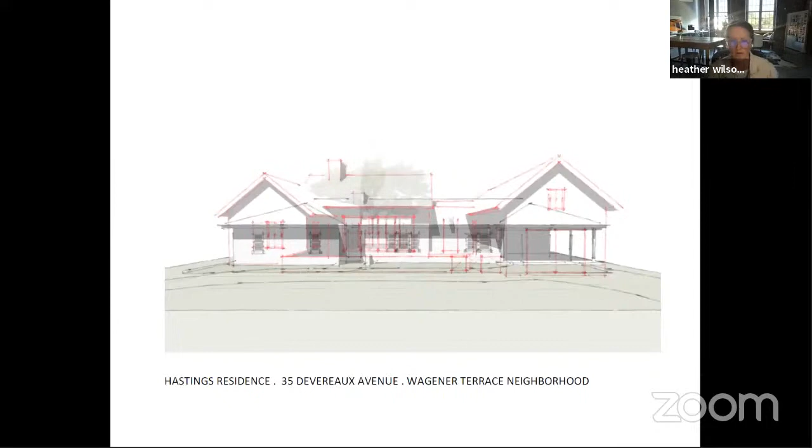Thank you for your time. I know most of you saw the property today, so I'll move through it fairly quickly. I want to start by briefly going over the history of why we're here today. The homeowners bought the house with the full intention of rehabbing it, renovating it, and living in the home. We were drawn to the low-slung nature of the house.

At the time, the flood zone went through the house and it was below flood by a foot. So the original plan was to add a foot to the interior finished floor and lift the roof. That was going to be the request. That's really what triggered most of the structural engineer's comments in the letter before you - any alterations to this property would be very difficult because of the sheathing and the lack of shear strength behind the veneer brick, and the state of the foundation, or lack of foundation, was not adequate to add to or renovate the home in any meaningful way. So that started the conversation about what best to do.

During all of this, the flood maps did change, and this is a very unusual situation in that the house is currently technically in an X zone, but it's 8 to 10 feet from a V zone, which is 4 feet above the finished floor of this house. So it's in a slightly precarious and unusual position. It's also unusual relative to the adjacent homes in that it is at grade. At the rear of the house, because the back is a drop floor, it's flush with the grade. So there really is no protection from storm water, both rain and surging. That's really the big issues we're wrestling with.

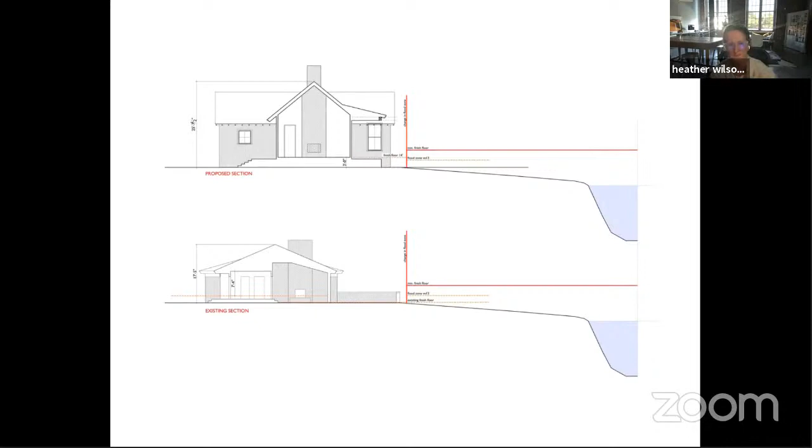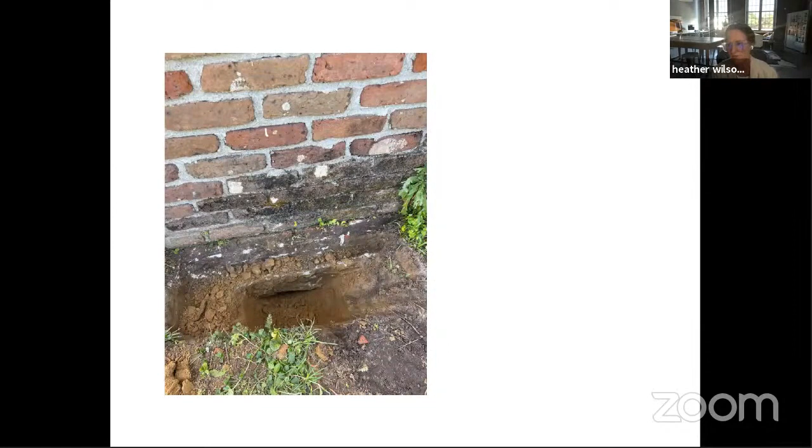That was where we did some excavating to determine the size of the footing, which is referenced in the engineer's letter, and the sheathing that doesn't provide the shear—it's crumbling. The engineer's letter.

Kim, I know you said you had to blaze through those, so that's fine. Heather, you've got about a minute left. Okay, well, this is how I finished.

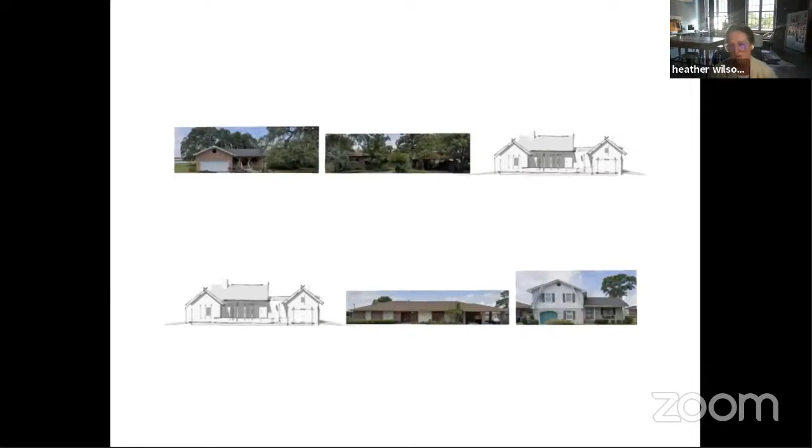I was just trying to show that, without mimicking the original home, we are really drawing from it in scale and design, and then again salvaging that brick and reusing it just as they did 52 years ago. We wanted to honor the material and the home in that way.

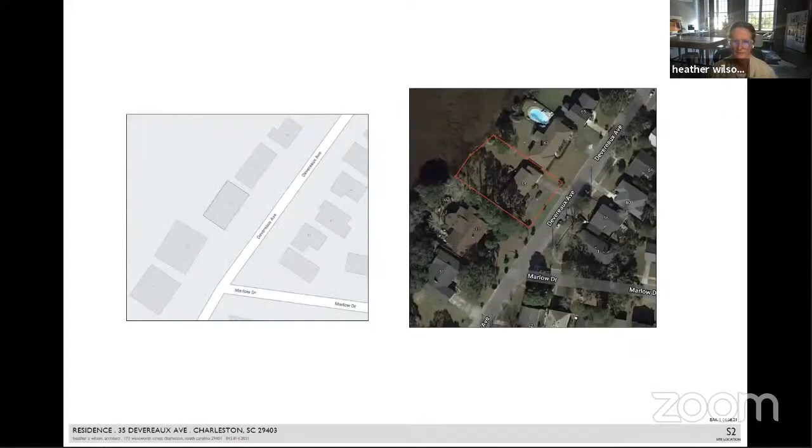You could probably leave it on either of those, as they're probably most material to the board's discussion. Those are the existing home.

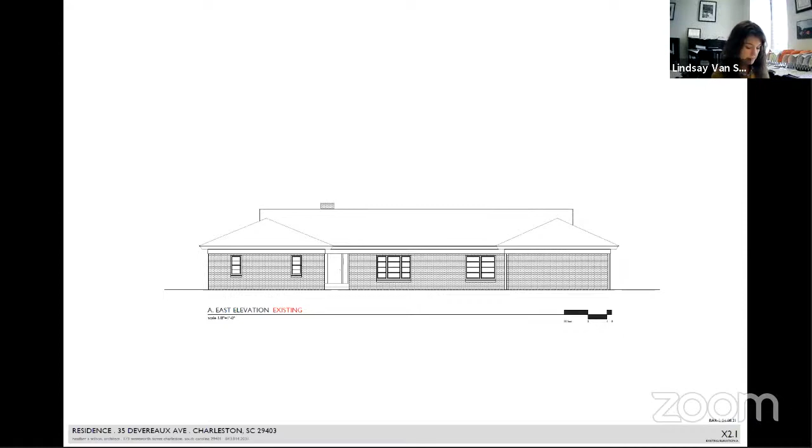On to agenda item number 2, 116 Ashley Avenue. Kim, you're on mute.

And if we have Carol Houle, Carol, you have the floor whenever you're ready.

Oh, sorry, yeah, and David. I'm here. Good afternoon.

I wanted to say thank you first. This is a very thoughtful process, and I have to say, for the record, I'm not an architect. I'm not a historian, but I'm a person who loves the historic charm of the city and would like to plant roots there. So I wanted to give you just a little bit of an introduction.

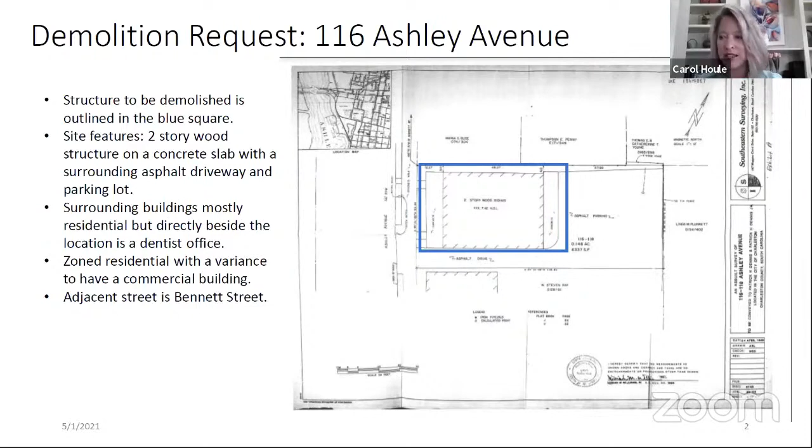And as I go through some of the other photos, you'll see that the drywall has been removed in the base of each of the rooms because of previous flooding. It's our perspective that this architecture does not render the character and charm defined by the traditional architecture of a Charleston residence and the houses that are around this structure. You can go to the next slide.

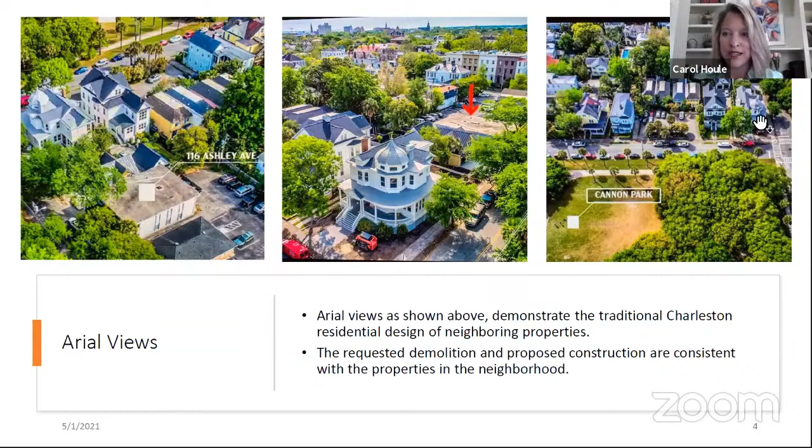So we'll walk down the street as if we were taking a stroll. This is that beautiful house at 11 Bennet that was recently renovated. You can see by the arrow, it is right next door.

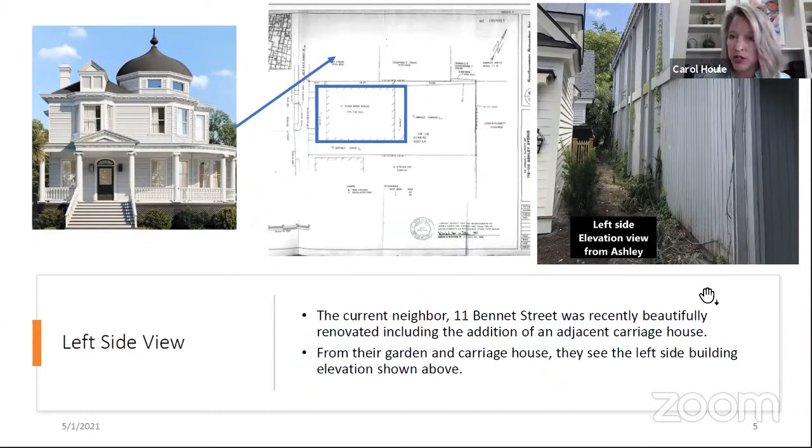It has a carriage house that was recently built, and a garden, and from their property, that's what they see, that left side elevation view. You can go to the next slide, please.

Walking down the street, this is 117 Ashley, which also has been beautifully renovated. And from their front yard, they see the front, and then they see this right elevation view there. You can jump to the next slide.

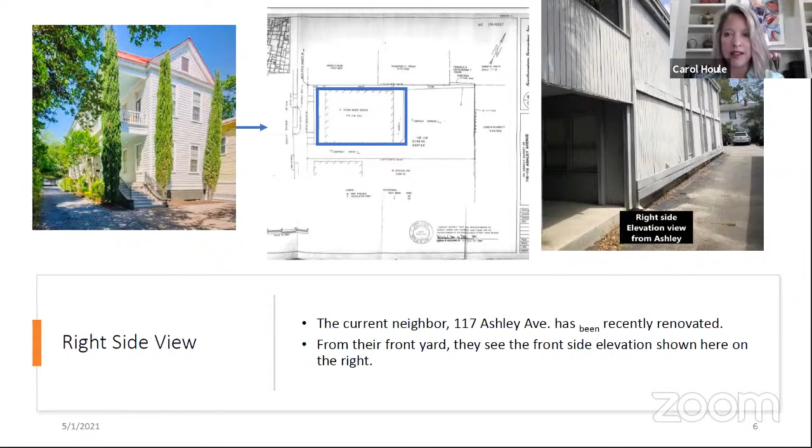Continuing down the street, this is the next house that again has been beautifully renovated. And from their front yard, they see that front elevation in the side. You can go to the next slide, please.

Again, walking down the street further, this is 113 Ashley, beautifully renovated. Now they don't see this back view, but I just wanted to continue walking you down the street so you can see what's happened in the neighborhood. You can see there on the right-hand side what the building looks like from the rear.

And we did take a walk, although I didn't include the pictures, around the street of the houses that would be on the backside of 116 Ashley. And it's the same story—they're all really beautifully renovated residential homes. Can you jump to the next slide?

So these are interior photos, and we have confirmed through conversations with an architect that the current structure doesn't allow us to move forward with more of a residential design. You can see that the drywall has been removed due to flooding.

I would like to point out, however, that does appear to be an original Apple Macintosh with a floppy drive, so we might actually keep that. It's funny—that might be good for the library. You can continue to the next page.

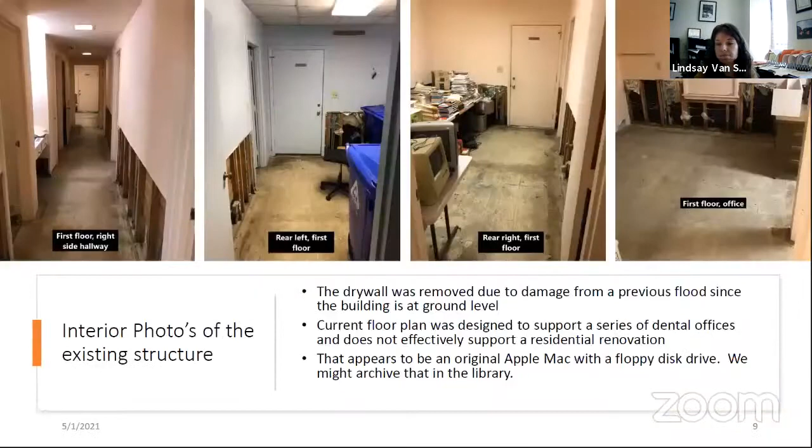All right, move on to public comment. Kim, it looks like we have no one speaking. We just have one letter from Timothy Liptak.

Timothy Liptak was at 114.5 Ashley. He asks: if demolition occurs, how will the owners ensure my property next door is protected, as well as my patients during business hours? Since the buildings in this area are in close proximity, how will you mitigate construction, traffic, and debris? And Kim, do we have anything else that I am missing? Nope, that's it.

Kim, if you'll give city staff comments and a recommendation. Sure. This building does not contribute to or characterize the neighborhood in Charleston Village, nor is it constructed with unique or irreplaceable materials. It is in the old historic district, which will require board review for demolition. So we are recommending final approval.

Thank you, Kim. Ms. Houle, did you want to respond to any of the public comments? Sure. Yeah, that's a great point. We are in no hurry whatsoever, and we're working with a company to do the demolition that seeks to preserve and reuse as much of the materials as possible.

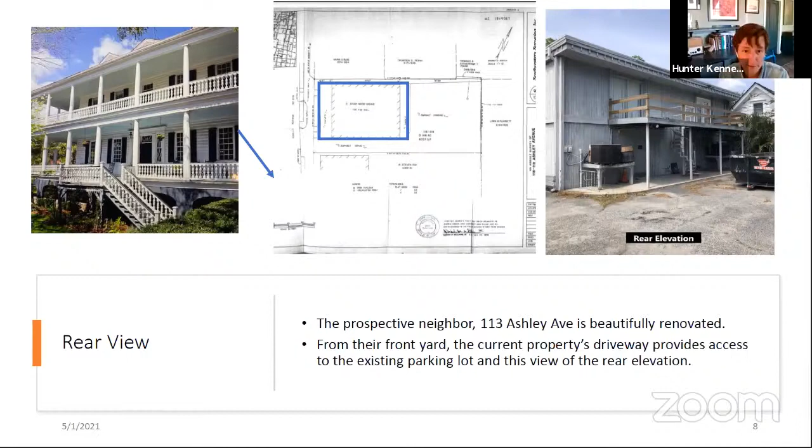Eddie? Yay, but you must salvage the Mac 2 computer as part of the deal. That cannot be demolished. That is a motion on the floor.

I'm checking. Yay, in favor. Julia? Yay, in favor. Chair votes with the majority and the motion passes unanimously.

Thank you very much for your time. I appreciate it.

Okay, agenda items number 3 and 4, both 60 Meeting Street, have been deferred by staff. Agenda item number 5, 4 Lowndes Street, has been withdrawn by staff. So we are on to agenda item number 6, 62 Queen Street. Kim, you'll give your intro. I will. Thank you.

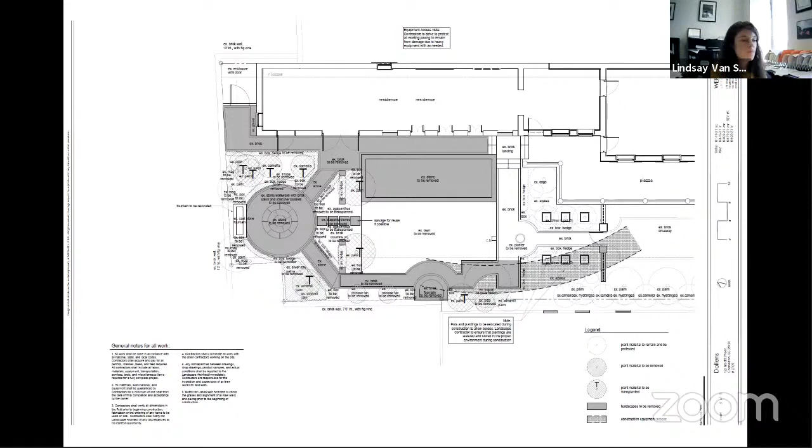Looking at the existing garden and speaking to the clients, we found that the circular patio space at the very rear of the garden was not very useful for families' needs and was really an ideal location for a new pool. We were able to maintain the dining terrace and lawn space, which is great for the kids, as you can see here, and their pets as well.

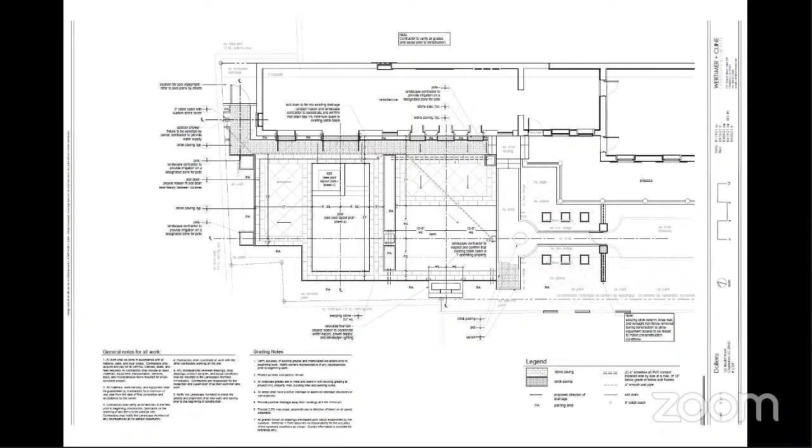There are currently 2 fountains back in the existing conditions plan. I can point those out. Advance one forward, please. Okay. One fountain at the rear is going to remain, but it's going to be relocated to the bottom of your screen in the middle, where that right there. So we're going to relocate that to where that existing fountain is, just to make room for the pool deck.

In order to allow for construction equipment access, we are going to have to remove a brick column and brick coping with a wrought iron fence. Just temporarily remove it and then build it once construction of the garden is complete.

And then as far as landscape lighting, we are proposing all path lights and one fountain light. I believe that's all I have. So if there's any questions.

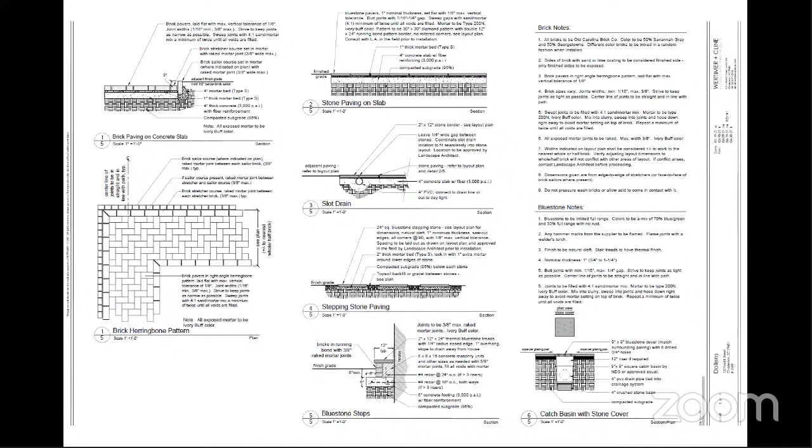Thank you. Since this is a Category 2 building, all modifications must be heard by the board. Otherwise, staff would have given a swift approval. We do suggest a dialogue to modify a policy statement to give authority to staff to approve minor adjustments to Category 1 and 2 buildings. Conversation for perhaps another time. This proposal is appropriate and modest, either reconstructing what was previously existing or only moderately visible. So staff is recommending final approval.

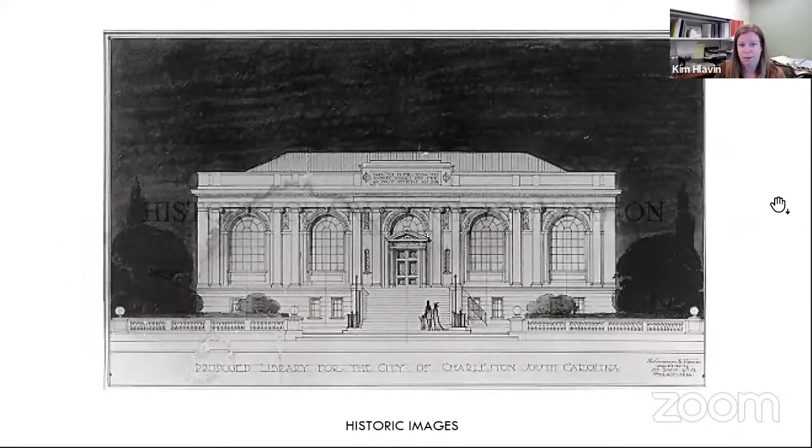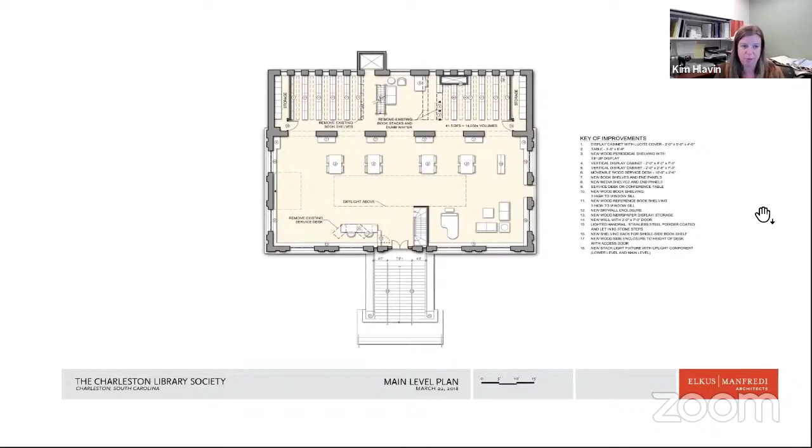Looking north on King and looking south, and some old images. This drawing was from the most recent trip the board made, the project made in 2018 for window replacement. I figured this drawing might be helpful to show where the bluestone treads are going, and this one as well.

And I'm going to turn it over to James and Dominique Volpe.

Mr. Volpe, you're on mute. You are still on mute. All right, here I am. John Smart was actually going to be talking, I was just following the meeting. I don't know if he's out there somewhere. John, you there? Oh, I see him. There we go, Mr. Smart, you're on mute. Mr. Smart, you're still on mute. Good afternoon, can you hear me all right? Yes, we can, thank you. Sorry about the technical difficulties there.

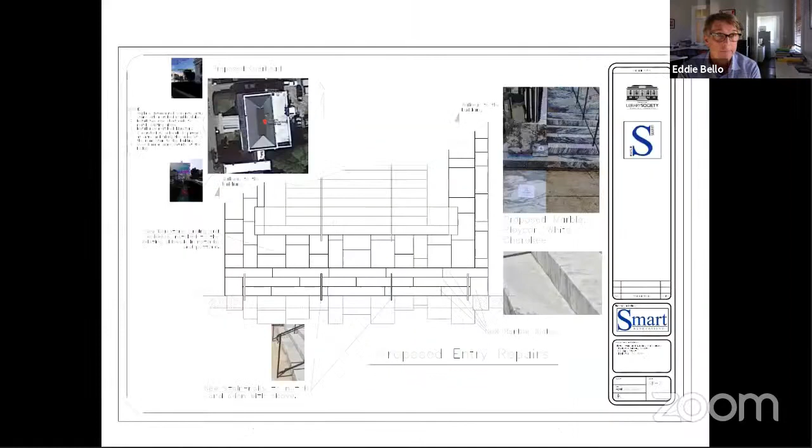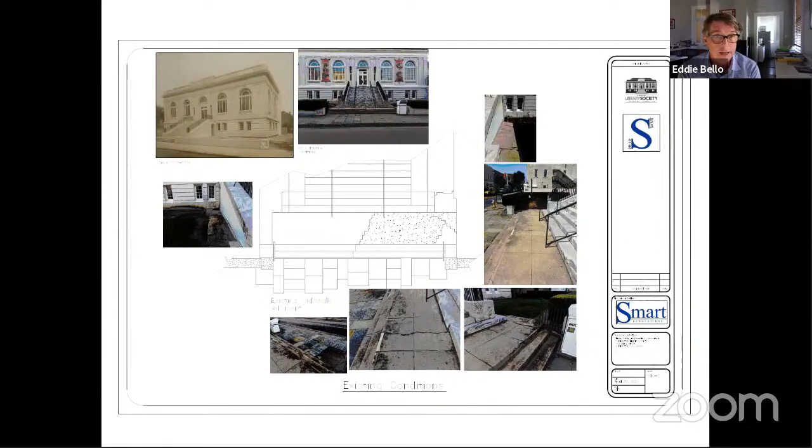I have one comment, and it has to do with why I brought up those railings at the bottom. Those aren't historic. If you look at the old photographs, those were never there. They were just added, and you don't need pickets per code or anything. So if the intent is just to have a handrail for people to get up the stairs, I would ask that they just match the simple railing design in the center of the stairs and put those on either side instead of adding those non-historic ones. I wouldn't want to match something that's not historic and not really needed.

I think it takes away from the elegance of the stairs. I didn't think they were going to match the picket rails, I thought they were going to match the ones in the middle. The picket ones aren't great, I'd rather not see those again. If those are going back, or he's going to add more to match it, I don't support that.

Maybe the applicant can clarify, because it's not on the drawings. I don't see it anywhere. It says in the application, new rails to match existing. I assumed that was without pickets, because that would be a waste of money. I agree, so maybe we can add that to the motion, that it would match the center rail design.

Final approval with a condition to match the existing rails on the upper run, no pickets. We have a motion for final approval on the floor with a board condition that they match the upper rail. Julia? Yes, no pickets.

Do you have a second? I'll second it. Eddie, thank you. I'll put it to a vote. Bill? Yay, in favor. Hunter? Yay, in favor. Julia? Yay, in favor. Eddie? Yay, in favor. Chair votes with the majority, and the motion passes unanimously.

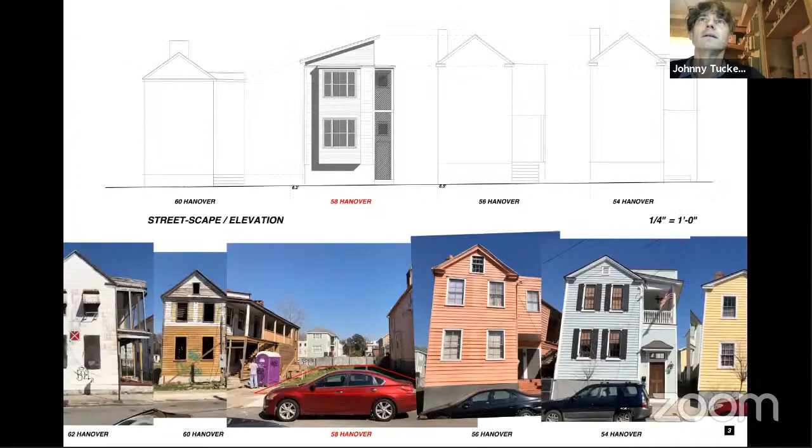So this is a streetscape, again looking east, showing that there are some sister houses to the south that are nice, traditional Charleston single houses, and then some smaller houses to the north. You see the one that's currently being renovated directly to the north. This is showing that we're trying to fit within the height, scale, and mass of the adjacent properties. Next image, please.

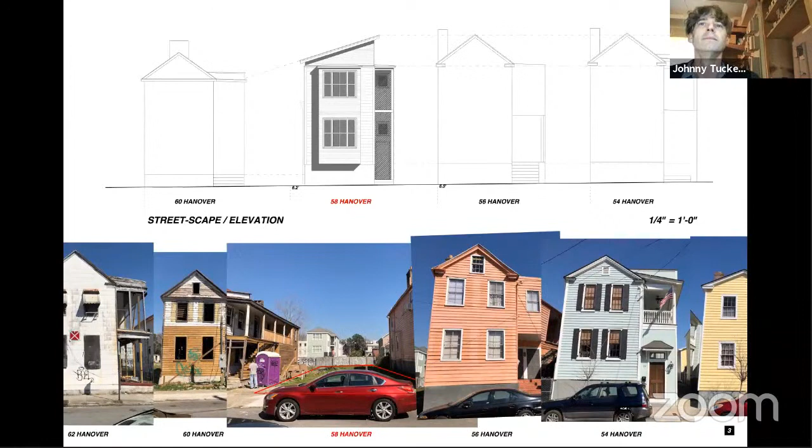And this is the streetscape on the west side of the street. You'll see, again, a nice row of Charleston single houses, some later, not as successful houses to the south there. It's hard to see, but that little red dotted line shows the ghost profile of the proposed house at 58 Hanover. Next image, please.

And it's a simple little single family house, 2 stories. We're actually elevated because of flood, but not a full story, less than 6 feet. It's a little over 1,700 square feet, 3-bedroom, 3-bath house, with a small roof terrace at the back, which you'll see in the elevations.

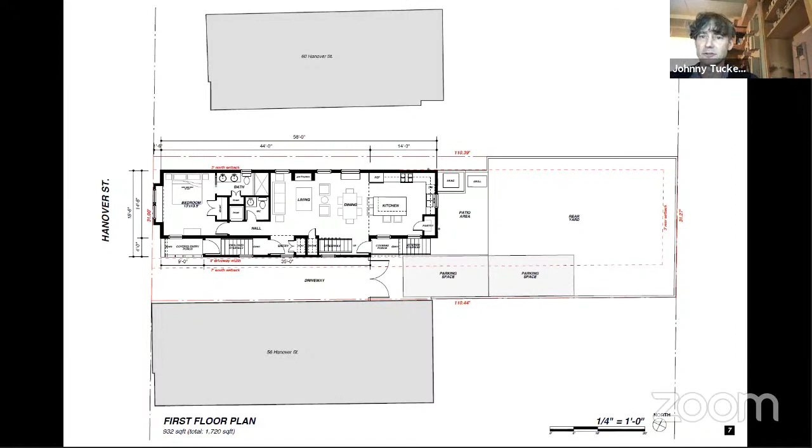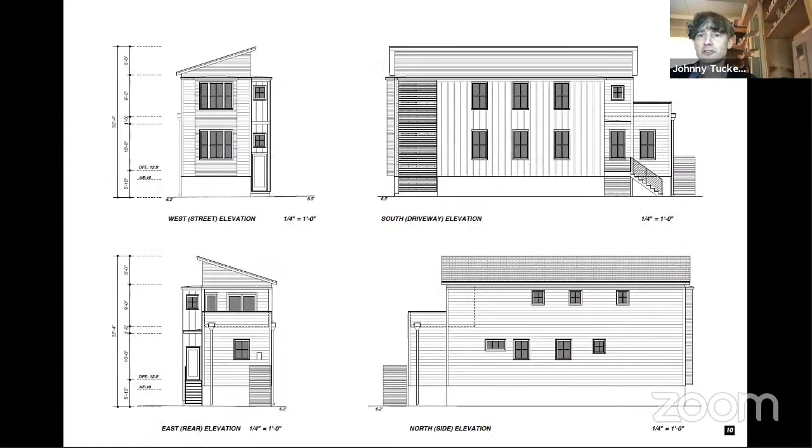And if you could go to the next one, the next four slides will just be enlarged. I'll just walk through those quickly.

So this is the West Street elevation, and you can see the flood maps have changed recently. Obviously downtown that's happened, but we end up in AE flood zone, so design flood elevation is 2 feet above that, right at 12 feet. Fortunately it's low here, around 6.2 to 6.5 feet above sea level, so we're under 6 feet for the base, the crawl space. Fortunately some adjacent houses have the same condition, so we think you'll see in the streetscape at the end that it sort of successfully mimics those.

South side, the south driveway elevation, you'll see there's a little bay window. If you don't mind going back one, Kim, thank you. I did show some shadowing on this front elevation, because you need to understand the three-dimensional quality of that bay sticking out 18 inches, and there's a screened element in what I'll call a piazza, although it's pretty skinny because it's a skinny lot. It's trying to create somewhat of a traditional feel of a side piazza, but it's not.

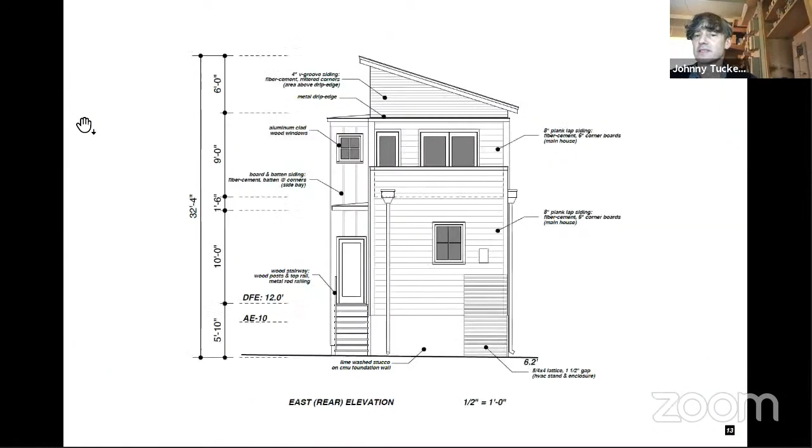And then that side element I pointed out, the piazza infill, not a piazza but as if it was a piazza infill, is the board and batten. And then just the lattice at the front piazza, horizontal boards painted. Not a lot of railing. As I mentioned, there's a parapet at the back roof terrace, but there is a side stairway - I didn't point that out, but you can see it in the plans or elevations. There's a side rear stairway, and I was proposing there, on the next slide back, right there, lower right, a back stairway to access the kitchen, which is where that proposed metal horizontal railing is, not super visible, but visible down the driveway. But it is a new house.

And then the last material, if you don't mind shooting back towards the end there, Kim. Oh yeah, last and least, it is an asphalt shingle roof, hopefully not super visible. It is a new house. Next slide, and I'm wrapping it up.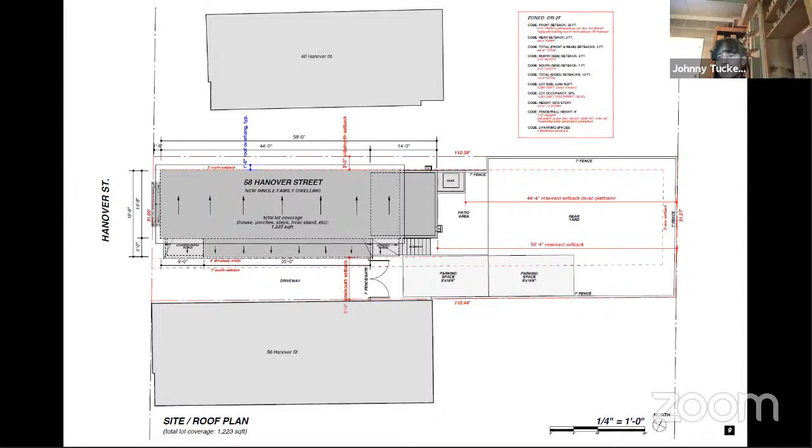Thanks, I'll ask one more question. On the front elevation, at that smaller mass - I won't call it a piazza - what we're seeing are just shadow lines, wide open with one horizontal tie-in at the midpoint. Yeah, this is, other than the shed roof, definitely unusual.

But since it's 4 foot wide, it's not a porch, it's an entry element, but it is covered because that side roof line extends the full width of that side element. The idea was to create a little bit of an unusual space that's covered, but not completely - because of the lattice, there's a lot of shade, mostly on the south wall. So that's what you're seeing. It is a double height space.

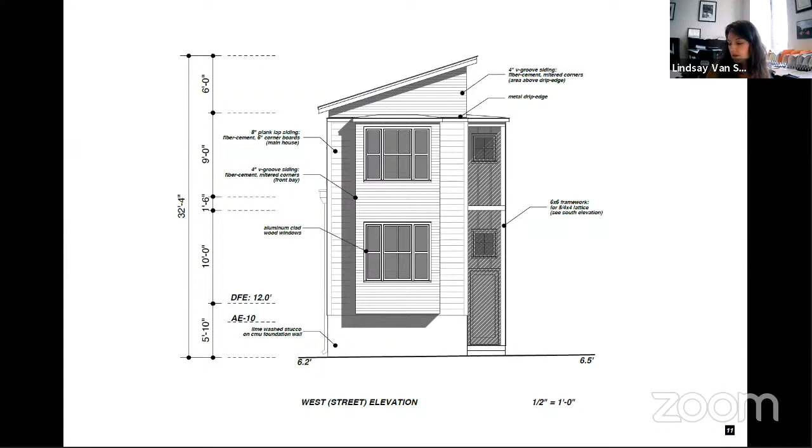Thank you. Any other board questions? All right, we'll move on to public comment. I think we have Earlene White.

Yes, can you hear me? Yes, we can hear you, Ms. White. I sent in a letter as well because I wasn't sure whether or not I could be here.

But my only concerns regarding this structure is the design of the roof. With the exception of a housing unit built in the 70s, all houses on Hanover Street between Columbus and Line Streets have the A-shaped designed roof. In addition, the majority have tin roofs. The lot at 58 Hanover Street is next to my house and in close approximation to 3 more 2-story houses that complement one another and maintain the A roof style. I sent some photos in.

He had already shown you, I believe, the south side pictures, and you would see how those houses are designed with that A-shaped roof. The house previously on the lot at 58 Hanover was also built with that A design to complement the area. I would like the owner to consider building the house with the A angled roof design so that it conforms to the traditional style and preserves a sense of history that we are accustomed to and proud of. Incidentally, those adjacent houses on that side of the street were all built in the 1850s, so they all really complement one another.

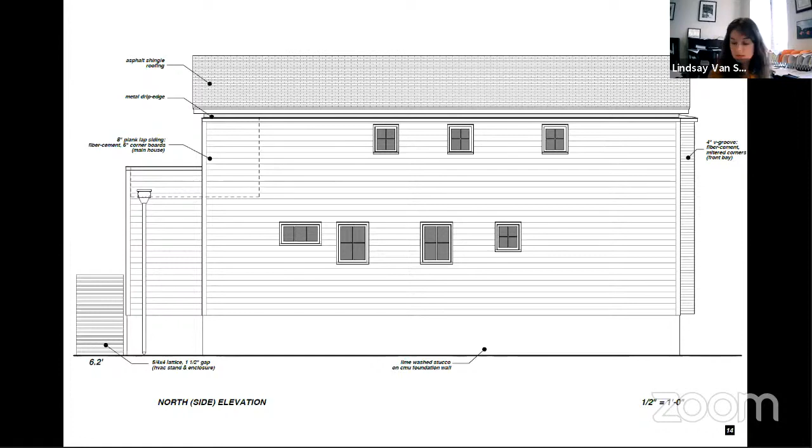Move on to Kim, if you'll give city comments and recommendations.

Typically, a shed roof includes additional clerestory windows to allow the entry of light. If it sheds to the south instead of the north, it has potential for solar collectors, but that might be the only positive of this roofline, which should be restudied.

The mass that simulates an enclosed piazza is inappropriate and should be restudied. The fenestration is orderly except for the north elevation; align windows with more consistency. The height, scale and mass is appropriate, but general architectural direction needs refinement.

So we are recommending deferral for general architectural direction, with staff comments noted. Thank you, Kim. Mr. Tucker, did you want to respond to any of the public comment or staff comments?

I will say the owners did present the project to the East Side Community Development Corporation, I believe is the name of the neighborhood association. I was not able to attend that meeting, but I believe the question of Mrs. White next door was brought up at the meeting.

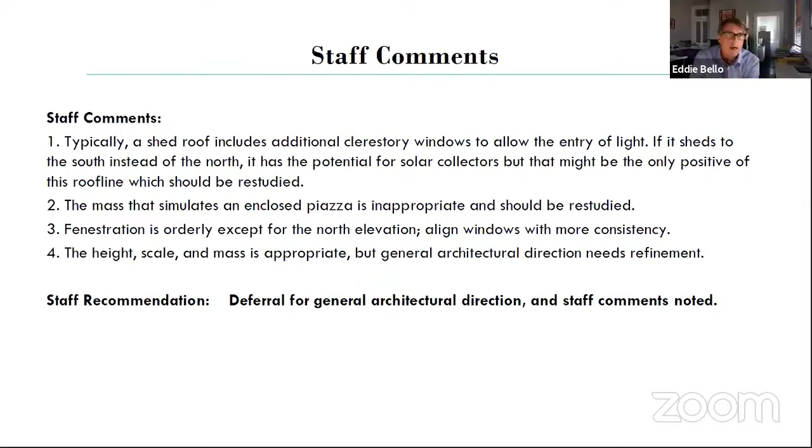Well, I'll add a couple things. I agree with what you said, Julia. I'm not opposed to the shed roof either. I do think part of the issue is, like staff brought up, the pitch has to be what it is—I'm guessing it's as low as you can go because you're using shingles—but you end up with just a blank space at the high portion, and that's not as strong as I guess it could be. So I don't know what you do with that, but I can see that being an issue, and I kind of agree with staff on it.

The only way to solve that would be to lower the pitch or lower the bearing height on the low side so it comes down and is a little more integrated with the building. I don't know, I know Mr. Tucker could figure it out, but I can see where, to me, that's a bit of an issue. I don't have a problem with the narrow entry—it's not a piazza—so I think all that's fine.

I like the lattice. This is more of a preliminary comment, but with just a single piece of wood over 6x6 posts, I think that could use a little more development and be better detailed, since it's the front of the house. The only other comment I had is can you show the south elevation, the next slide? I think it's the next one.

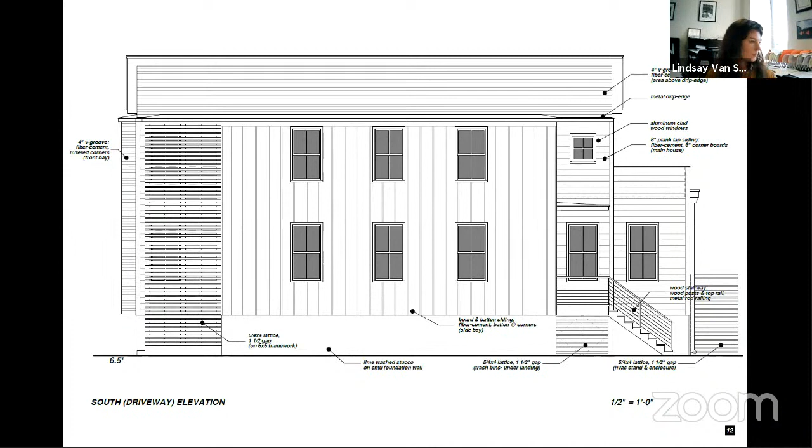Thank you, Mr. Tucker. Moving on to agenda item number 10, 17.5 Hanover Street. Kim, will you give an intro. Thank you, just bear with me for a moment.

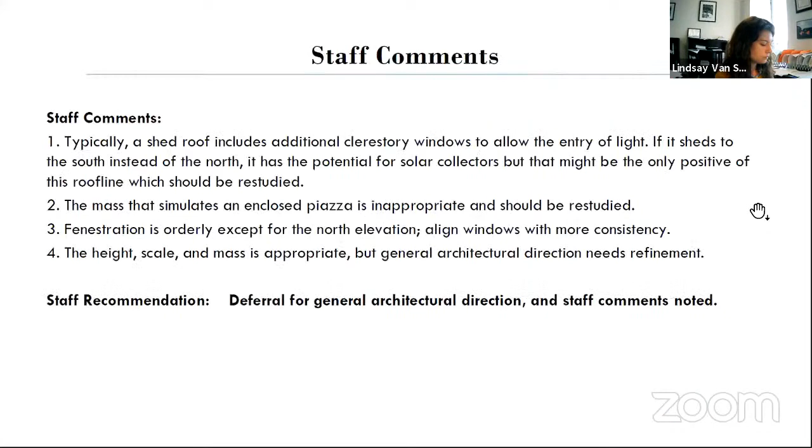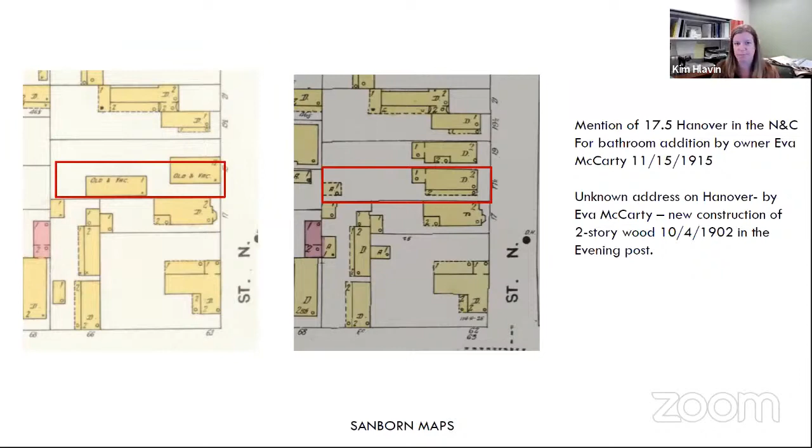Just going through the motions to find the age it was constructed. There's a mention in the News and Courier of a bathroom addition by owner Eva McCarty in 1915, and earlier an unknown address, but by Eva McCarty, for new construction of a 2-story wood building in 1902. On April 8th, 2021, the conceptual approval with staff comments was the motion. I'm not going to read these staff comments unless you want me to.

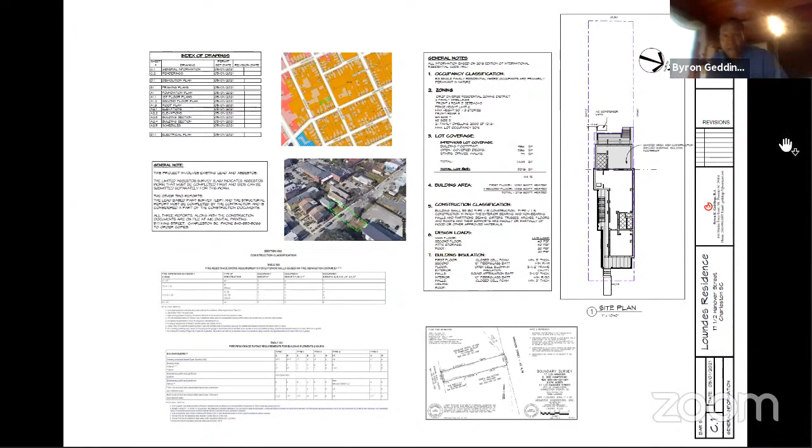We would like to start with the second drawing, please. The comments generated at the last meeting led us to add the additional columns requested to the front of the front elevation of the structure. We also went ahead and balanced the column spacing on the piazza on the left side.

Also, we adhered to your comments requesting to retain the original building walls as much as possible. So we had a wall that was removed, but we put it back as requested by the board. We incorporated wood railings and balustrade for the piazza railings and stairs, and followed through with introducing a hip roof over the second floor front porch.

The other change we incorporated was regarding the rear of the building. I think at our last meeting it may have been a little misunderstood, but after the piazza, that area that protrudes out, that's an addition to the house that was done. I was told by the owner it was done around the 1970s, and I just wanted to note that that is an addition. Our proposed addition now has been recessed, indented behind that, to hopefully reflect that it's not part of the original building. However, I think it works overall with the structure.

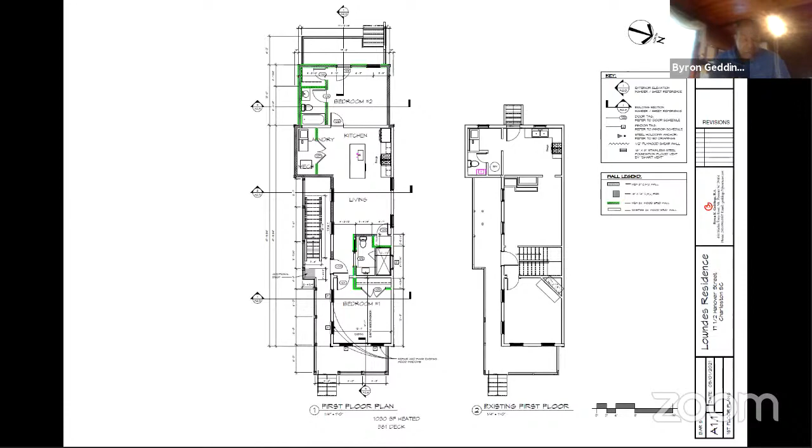Going back to slide number 2, we changed back to eliminating the PVC and incorporated wood trim and HardiePlank siding. I'm learning now there may be some issue with the hardy plank. If there is, we are open to change it to wood siding. Underneath some of the building there is some old wood siding, not over the entire building, but underneath the existing vinyl there is some of it, and it appears to be a 1x5 novelty siding pattern. I can find 1x6 novelty at Southern Lumber, but not a 1x5, so we'd have to find that if we go back to that.

Besides that, I think I may have hit all the comments generated at the last meeting. Yes, I think I have addressed the comments. And I do know that Ms. Robin Lowndes is on the line and available to also speak.

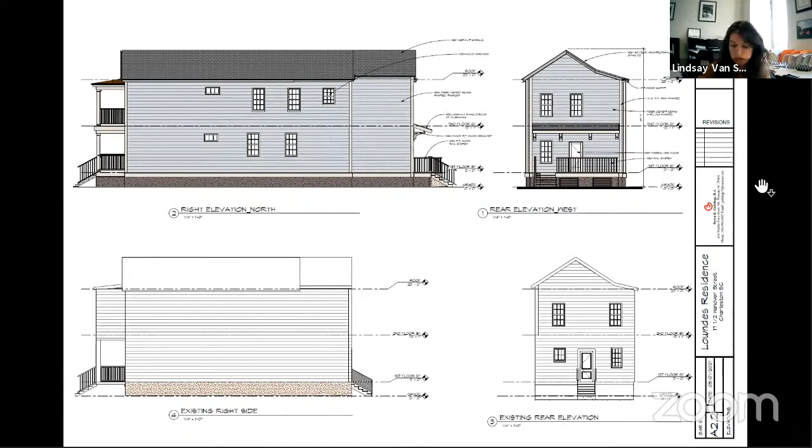Attention BARS, May 13th, agenda item number 10, 17.5 Hanover Street. My name is Reverend Matthew Rivers, pastor of St. John's Chapel. I wanted to just say that I am in full support of the renovation at 17.5 Hanover Street. Thanks, Reverend Matthew Rivers, and that is it for public comment.

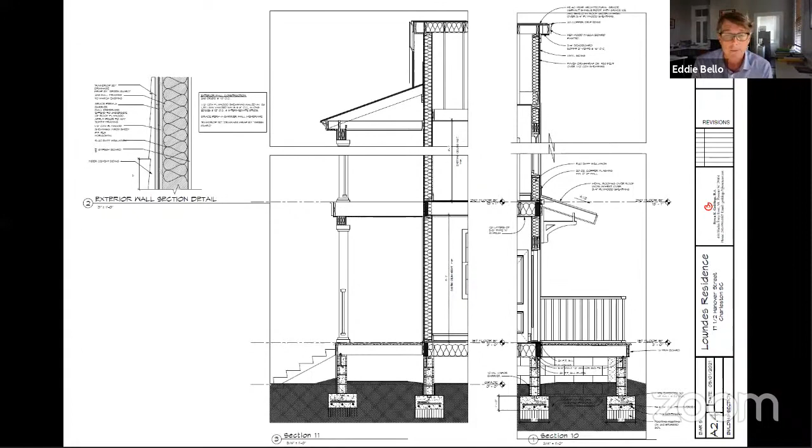And if you look at the front elevation, there's a column that comes down with no pier underneath it - the one next to the stairs. I would just put a pier there and let the stairs die into that pier. Simple stuff, but I think it will make a big difference as it presents itself on the street. So those are my only comments. I think it looks great.

And I agree with staff about the cementitious siding, that it should be wood.

This is Bill. I'd say I agree with those comments from Eddie, and I would think those are minor. Staff could review those. Right, sure.

If everybody's okay, I'll make a motion for final approval with staff's comments and final review by staff. Second. Okay, we have a motion on the floor with final approval with staff comments and final review by staff. We have a second from Julia.

So put it to a vote. Eddie? Yay, approval. Hunter? Yay in favor. Bill? Yay in favor. Julia? Yay in favor. Chair votes with the majority, and the motion passes unanimously. Thank you, Mr. Geddings and Mr. Bynes and Ms. Lowndes. Thank you.

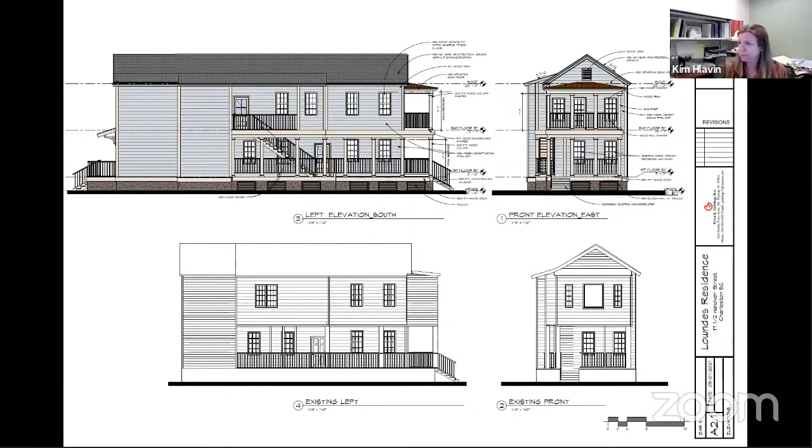11 Anson Street is requesting new construction of a two-story addition at rear and to south of the existing residence. It's a category 3 or 4 maybe in Ansonboro neighborhood, circa 1889, and in the old and historic district.

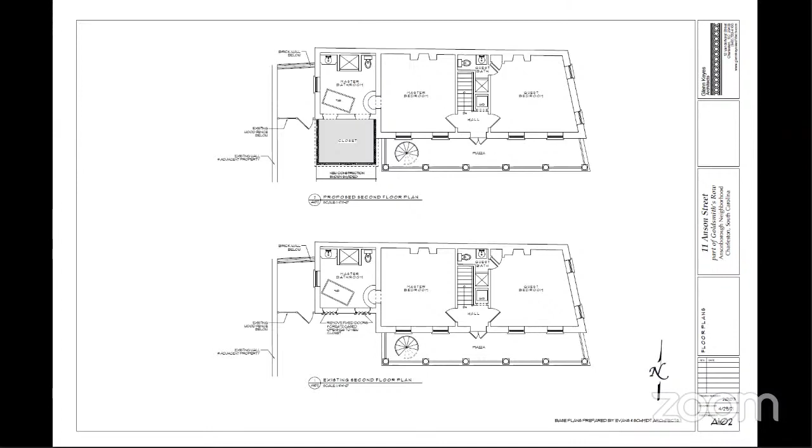Can you go back one, Kim? This wall of the dependency...

has some severe structural issues. Russell Rosen has proposed that we have to take down the upper half of the wall and rebuild it, or we can buttress the wall with this new addition. We think that's the better solution to keep that wall and create a structure with this new addition that can buttress that wall, and Mr. Rosen is prepared to help us with that design. So we're asking for conceptual approval.

Let me know if anything else I can answer for you. Thank you, Mr. Keyes. Do any of the board members have questions at this time?

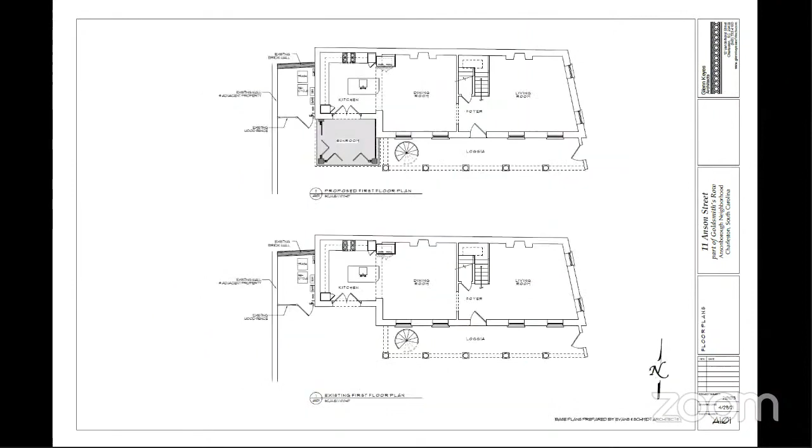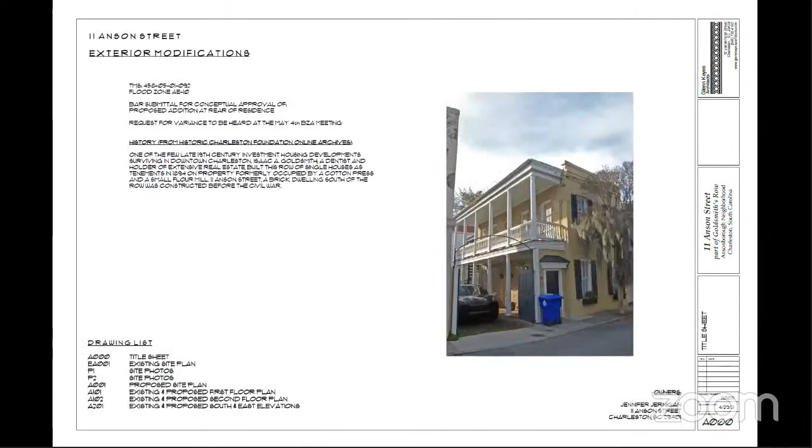Okay, thank you. But regardless, if you look at the photograph, Kim, go back to the first sheet with the photograph down the driveway. One more. In the middle one, Eddie, you can see, that was it. I think you have a delay, or I have a delay. Okay, yeah, I mean, I went by there, so I know the house. I just don't really have a good feel for what this is going to look like from this, I guess, east elevation, without a drawing.

Just, can I interrupt for a moment? In September, I think with the gate, they had approval pending, issues resolved for the rear, for this gate here. BAR Small gave them approval for this configuration after their rear issues were taken care of. And with the potential approval of this, the rear issues will be expunged.

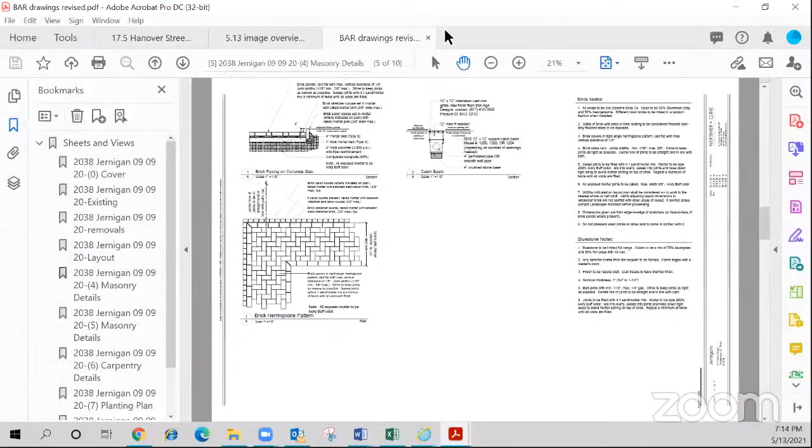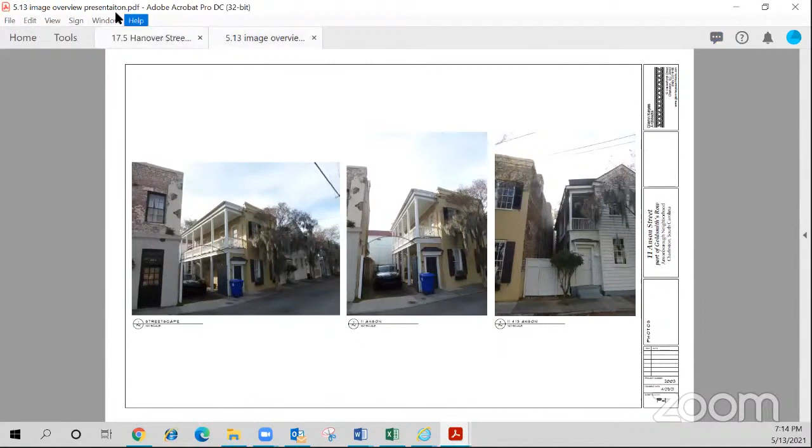Okay, if we can go back to that photograph of the front, please. Sorry, I was not aware that this had been approved. But as you can see, Mr. Bello, we can certainly draw this elevation, but everything happens back of the piazza column line. So anything seen would be pretty minimal, I think, with the perspective, even with iron gates there. And it's glass on the ground floor, essentially a glass sunroom. So we can certainly provide more information, and that would be helpful.

Okay, thank you, Glenn. Any other board questions at this time? This is Bill. I guess I have a question for staff, and maybe my recollection is getting worse as I get older, but I thought I remembered at one point an application on this home to use some Philip Simmons gates that were found somewhere online that they were going to use and put here. I'll open it up again.

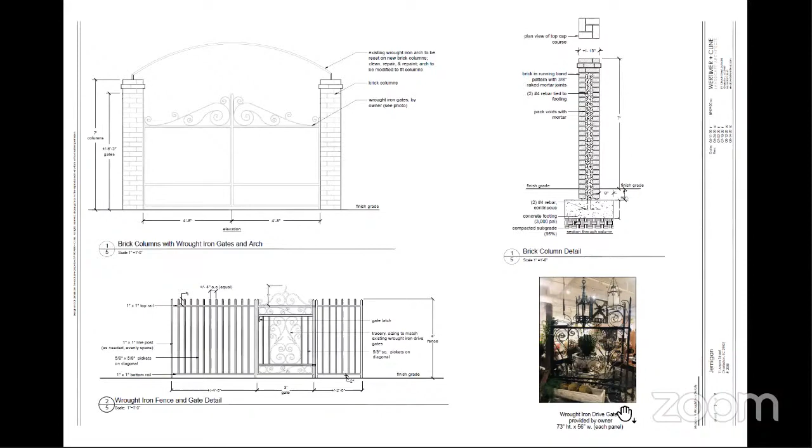This is Kim. Yes, this is the gate that the owner has decided to use. Kim? Yes. So I just got a text from the owner. She said those gates are no longer available. They've been purchased by someone else in Mount Pleasant. So there'll be a new design coming to you from Ms. Wertimer.

Any other board questions at this time? Okay, we will move on to public comment. We have Erin Minnigan.

Thank you. Erin Minnigan with the Preservation Society of Charleston. We would like to thank the applicant for being in communication and walking us through the proposal. We are somewhat disappointed to see the change in approach from the previously approved design from, I believe, 2018, which restored the former porch and its footprint as seen on the Sanborn maps. However, we understand the current proposal is driven by zoning constraints and there are similar additions in the area. Given the most visible portion of the addition will be the second floor from Pinckney Street, we would encourage the upper floor to become more transparent and incorporate more glazing similar to the first floor, to better reflect the porch that once existed in this location. Thank you.

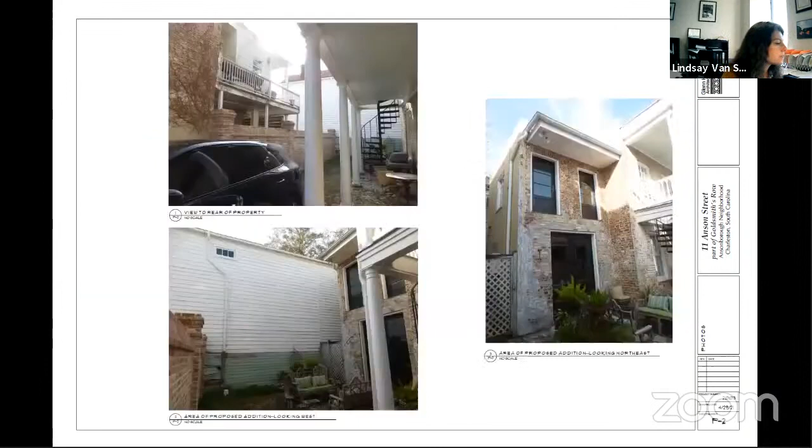Thank you, Erin. I think that's all we have for members of the public speaking, and I have a couple of letters here. The first is from James A. Rice at 62 Society Street.

We also have a letter from Kelly and Dan Mena at 30 Pinckney Street. Kim Lavin, we are writing to express our support for the addition dependency at 11 Anson Street in Charleston. Ms. Jernigan has kept us up to date and well informed of her plans to add a dependency at the back of her property. We have seen the renderings proposed by architect Glenn Keys and believe it to be in line with the historic preservation additions we have seen in the historic district. We appreciate her honesty since our property overlooks her courtyard directly, where the addition will be. We are also in agreement and in support of her courtyard hardscape proposal by Sheila Wertimer, as it will add much needed green space between our residences, allowing for some privacy as well. So with our property and privacy being the most impacted, we are in support of this addition to the back of her property. Sincerely, Kelly and Dan.

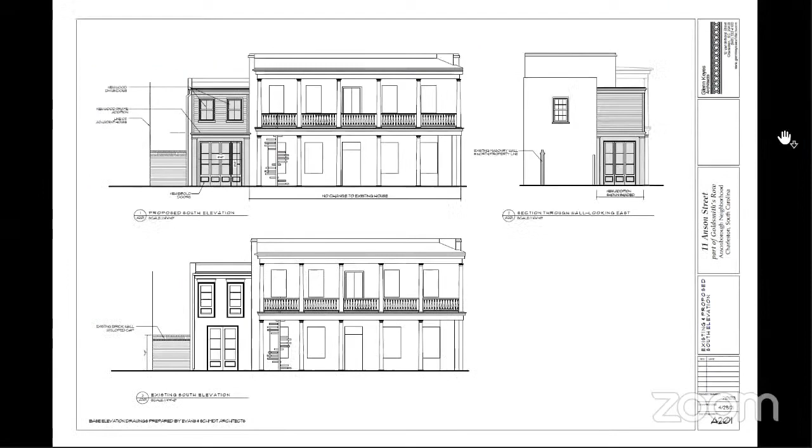Thank you. Thank you, Kim. Mr. Keys, did you want to respond or clarify anything with respect to the public or staff comments? No, I'm fine. Thank you. Thank you, Mr. Keys. I'll open it up for board discussion and a vote at this point.

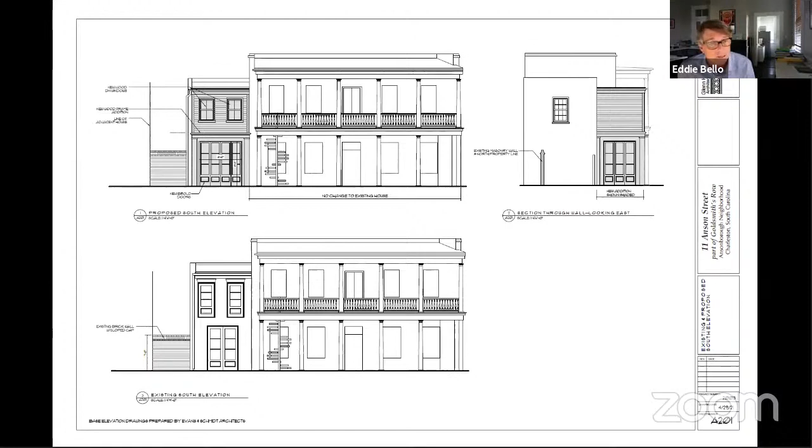All right, well, I'll start. I think it helps me a lot knowing that there was a porch back there, and it would be helpful to know if this is extending further into that former footprint. I guess it is. And given Mr. Keys's long history, I'm not overly concerned, but it is kind of hard to want to approve something when I don't know what it looks like. So that's a little bit tricky for me. The top floor is just going to be siding because it's a closet, and I'm guessing those windows up there are going to be covered either in clothes or there's going to be a curtain behind them forever. So anyway, generally conceptually I'm fine with it.

This has nothing to do with this application, but I don't think a wrought iron gate like that is appropriate on these houses. All of these houses right here, and Mr. Keys knows this as well as anyone, are all very small. These were kind of the working man's street here, and they were always very low key, not elaborate houses. I think a very fancy wrought iron gate is inappropriate for the house, so I probably won't be here next time. So you can submit it next time, Glenn, and get it approved. But I'm just going to put that out there. I don't think it goes with the house, and it's just not in keeping with that side of Anson. Conceptually, though, with what you're asking for, I think it's okay. It's fine. So I would be okay with that going to staff.

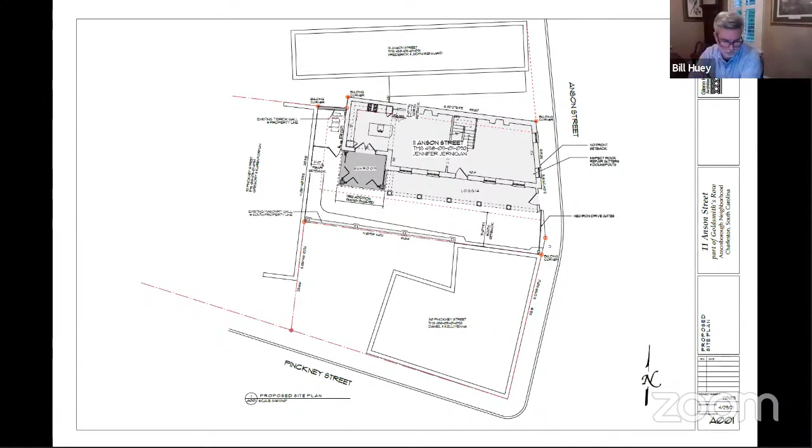I'll put it to a vote. Hunter? Yes, in favor. Bill? Yay, in favor. Julia? Yay, in favor. Eddie? Yay, in favor. Chair votes with the majority and motion passes unanimously.

Thank you, Mr. Keys. Moving on to the final agenda item tonight, since agenda item number 15 was withdrawn by staff. We are on agenda item number 14, 157 Wentworth Unit E. Kim?

157 Wentworth is requesting conceptual approval for new construction of a 2.5-story house. It's in the Harleston Village and in the Old and Historic District. Here's a little context: it's on the south side of the street near Colonial Lake. This is looking at the rear of the property. You can see here another structure built right next to where this one is going. This is the property here, and you can see the red rear shed roof.

Here are some images of the house from the street. This is looking east on Wentworth, and this is looking west. Excuse me, looking west, and this is looking east.

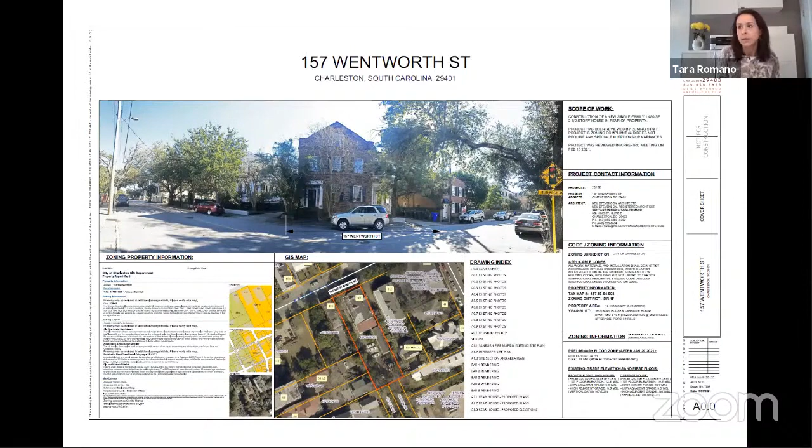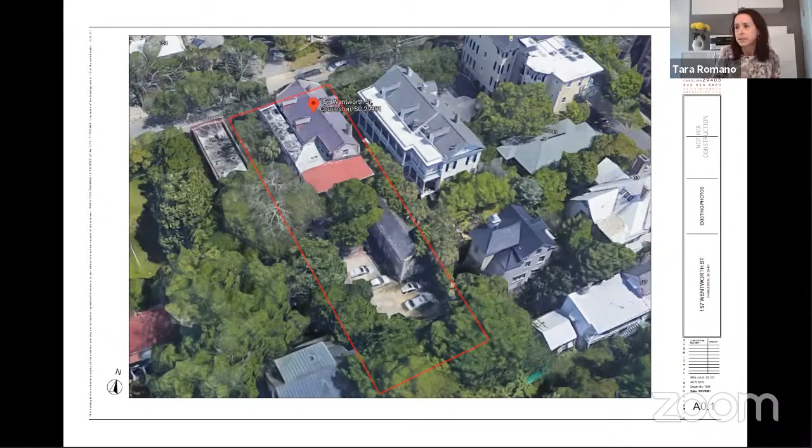Flipping through a couple of the next pictures, you can see this overview. That main house at the front currently has 4 units, and the carriage house currently has 2 units. You can see there's a pretty large area left over at the rear of the property. You can flip to the next one, and the next one.

This property has been left derelict and the structures have been neglected for many years. It's been an unpleasant sight for the neighbors, and they have let us know many times. The new owner wishes to bring the historic buildings back to life—he's planning to repoint the brick, repair the shutters, remove the window AC units, and repair historic exterior details. The interiors are grand and have much of the original historic fabric, including the original flooring and woodwork. It'll take a lot of work, but the owner is excited to bring this property back to life.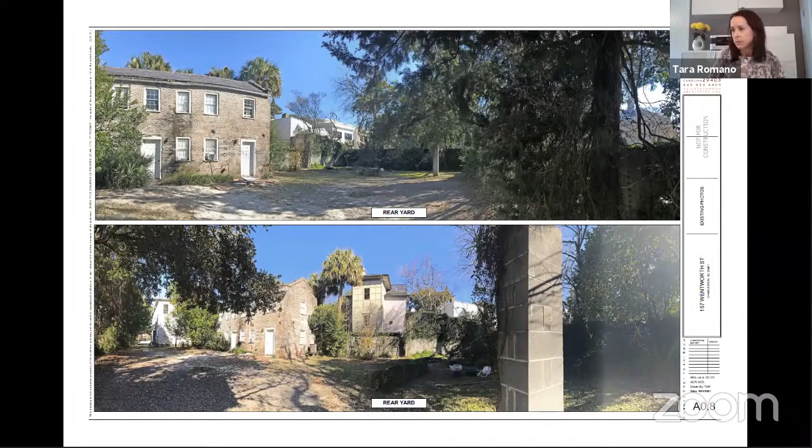You can also see in these photos there's a large slab and remnants of walls and columns left over from old structures that used to fill the whole back of this lot. We can take a look at the Sanborns next, and you can see where those structures were at the back of the property. I think that's a couple more slides.

It's the driveway side of the house. And then next one, okay.

At the bottom of the screen, you'll see in 1902 you had the main house structure and the carriage house. As the years went by, by 1944 the rear addition shows up on the main house, as well as some outbuildings in the rear. Then by 1955, you can see that the whole rear lot is filled with garage structures, and that's what you saw in the photo.

Looking above this, at the existing site plan, you can see there's a concrete pad left, there's columns left, there's walls — so there are remnants and pieces left over on the site. Next slide.

So going to the proposed site plan, showing the new footprint. The new house sits back from the edge of the main house, as far as looking down the driveway type of view. The new house is 152 feet back from Wentworth Street. Therefore, as you'll see in the renderings later, the house is barely seen from Wentworth Street.

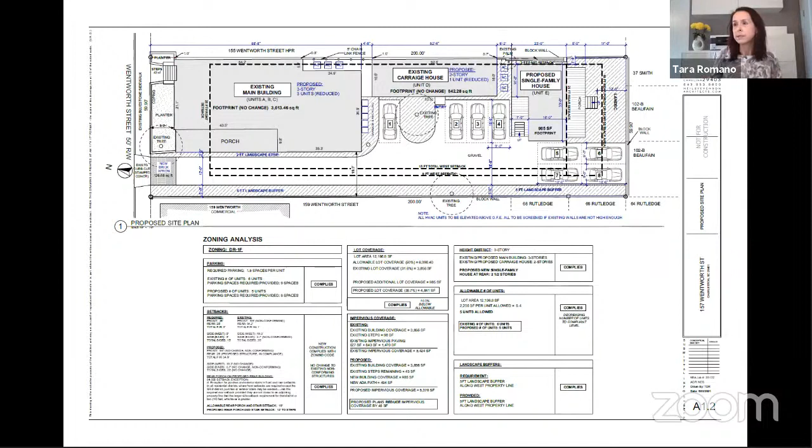The carriage house back there is kind of tricky. We had numerous discussions with the groups about the fact that the carriage house only has 7'6" high ceilings, and it's sitting right on the ground. So there was some discussion that it would be unreasonable to base the height of the new structure on the carriage house height.

At the same time, I think the language of the code says you need to be subservient to the main house, and we've kept this new house pretty subservient, as you can see, to that main house.

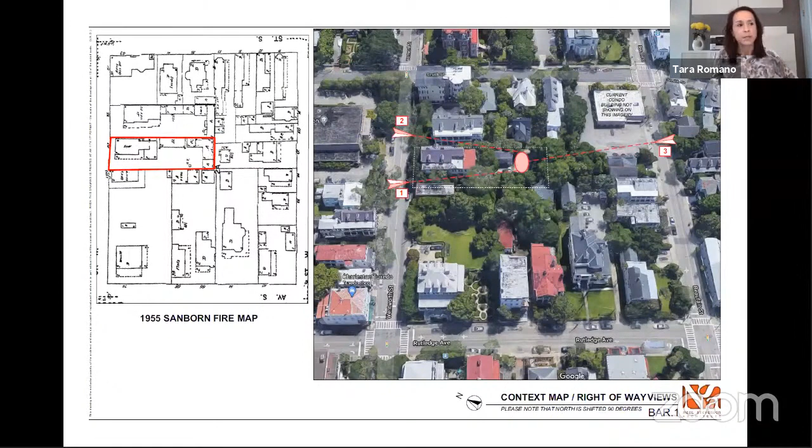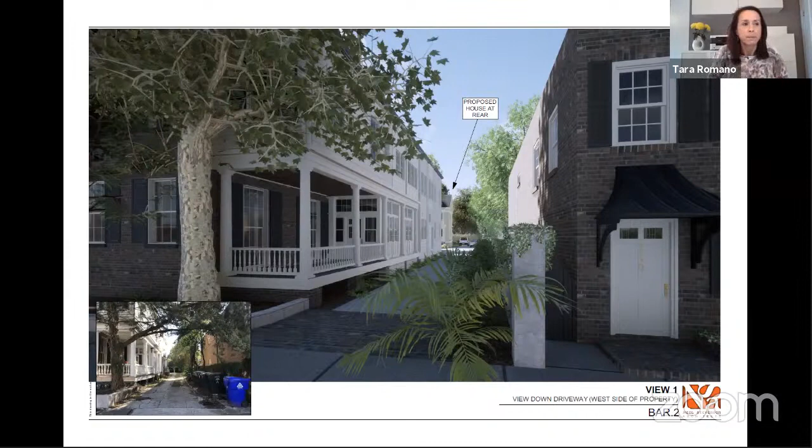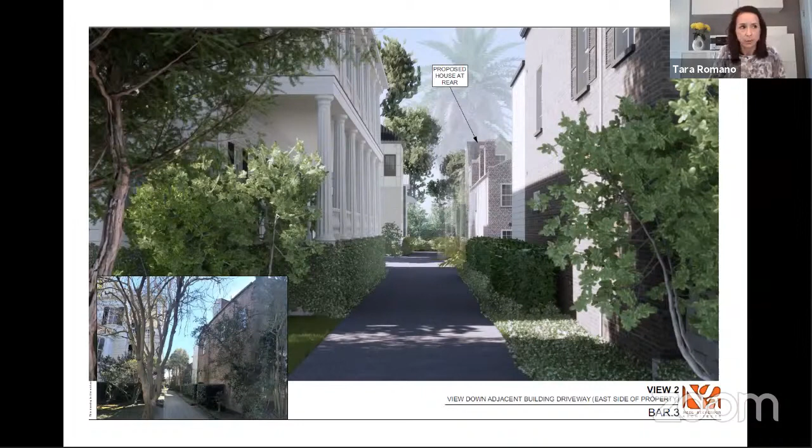We've been discussing with the owner going with a color palette that makes the house blend in a little more and disappear, some darker colors. Next slide. Just a reminder, we're over time.

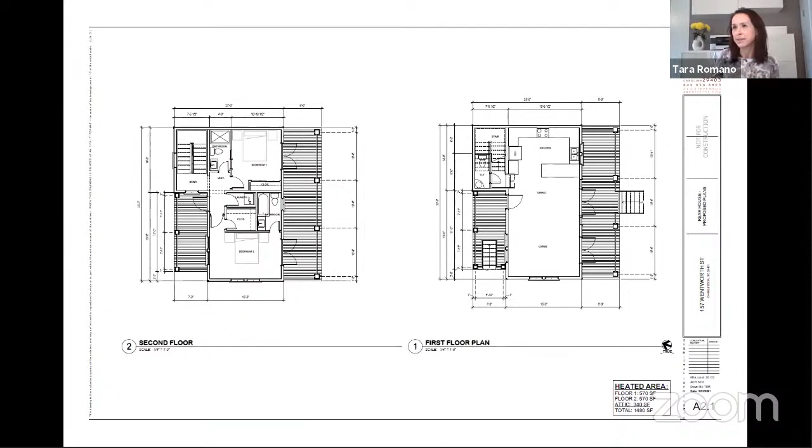These are the floor plans - basic living areas on the first floor, 2 bedrooms on the second floor. Then you have attic space on the 3rd level, which is a half level.

To close it, we've met with and received a lot of positive feedback from the immediate neighbors here. We've also had numerous meetings with the neighborhood association, BAR staff, and historic groups. We started this with a 3-story building, larger footprint house, and it's evolved into a smaller building along the way based on feedback and collaboration.

Again, this house is 152 foot back from Wentworth Street and is mostly hidden by other structures. The owner is excited to bring this property back to life, and the overall improvements he feels are going to be of good benefit to the neighborhood.

Thank you, Ms. Romano. Do my fellow board members have any questions at this time?

All right, moving on to public comment. We have Erin Minnigan speaking.

Thank you. Erin Minnigan with the Preservation Society of Charleston. We would like to thank the applicant for reaching out and being responsive to our feedback. This project has been through a few iterations and we feel has progressed in a positive direction. In particular, the location and scale of the footprint is much improved, and we are generally comfortable with the height, scale, and mass of the building. However, we do feel some refinement is needed on the architectural direction, as we feel the building currently appears too suburban.

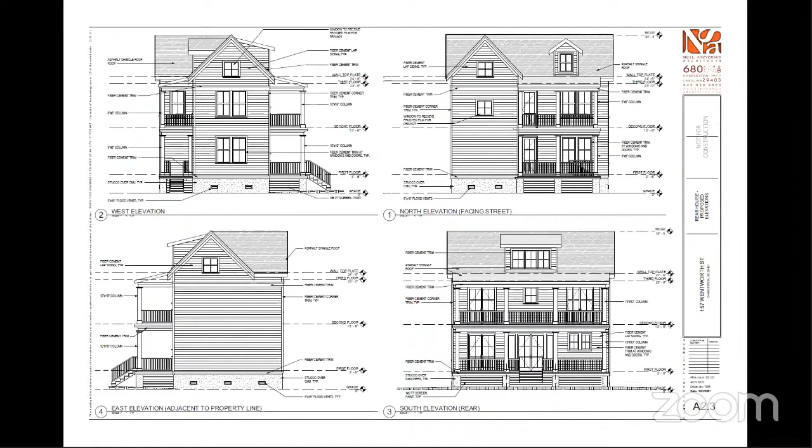The proposed north elevation dormer can be modified to match and should be centered on the windows below. On the south elevation, we recommend resizing the small second floor porch windows so they're consistent with the other windows on this elevation. Thank you.

We also have some letters. The first is from the Harleston Village Association. Dear members of BAR, we have reviewed the application for the construction of a new single-family residence at the rear of the property at 157 Wentworth Street, an important 1853 Greek Revival masonry residence in our neighborhood.

We look forward to the applicant moving forward with its restoration with hopes that the piazzas will be reopened or developed in a more sensitive enclosure. We appreciate the efforts of the owner and architect, as we see the scale of the new building has been reduced and upper porches and decks were removed with the latest design. However, the new site section shows a building whose height, scale, mass, and overall design direction warrant further study.

Please consider the following points. We feel the new building is still incongruous with the main house and existing historic structures on the property. Relative to scale, the building is taller than the dependency directly adjacent to it due to its third floor. Stylistically, it appears the current design shares no details and takes no inspiration from the historic structures on the property. The new building does not relate to the main house in the hierarchy of form traditionally found with dependency structures throughout Harleston Village, making it conspicuously out of place.

We would like the board to pay special attention to the south facade. This side will be the most publicly visible part of the structure, easily viewed from Beaufain Street. As for the land plan, we suggest the brick apron continue to the corner of the main structure to further contain the gravel parking area. We would also like to see space for a landscaped area at the base of the new structure rather than bringing the gravel up to the foundation wall.

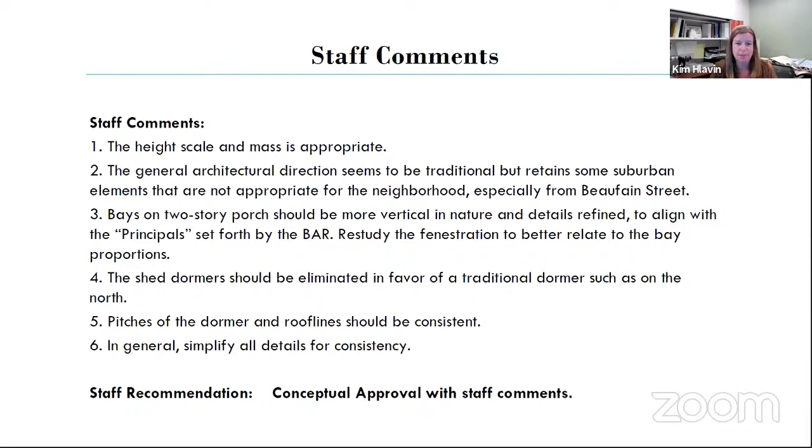Restudy the fenestration to better relate to the bay proportions. Shed dormers should be eliminated in favor of a traditional dormer, such as the one on the north. Pitches of the dormer and roof lines should be consistent, and in general, simplify all details for consistency. Staff is recommending conceptual approval with staff comments.

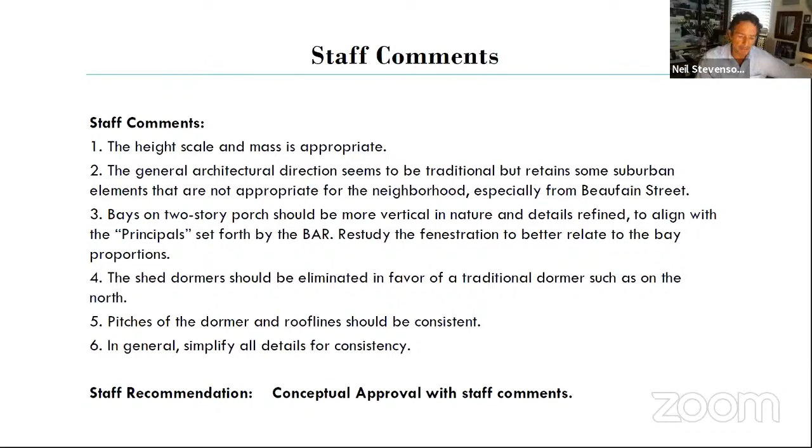Actually, I was going to offer the rebuttal if that's appropriate. I'm Neil Stevenson, Neil Stevenson Architects, and I'd say in general, we've met with all the neighbors in the vicinity.

We've had several Zoom meetings with the other neighbors and we've been listening to feedback. You can see on the Sanborn maps that historically having buildings close to each other and packed into the back is relatively common, especially in this area. We did try to move this a little further back from the carriage house. As Tara said, the carriage house is challenging as far as trying to keep the subservience, which is really based on the massing of the main house. We've gone over and over this. I think we're getting close.

I agree with the Historic Charleston Foundation suggestion of maybe reducing that gable and doing something more. I don't think a shed roof is necessarily out of place here. I think it offers some benefits, and if you look in this neighborhood, there are many examples of shed dormers.

So I would disagree as far as whether that rear house should be completely a replica of what's going on in front of it. The styles are already different, and you can see the house to our east, which this board has approved, is drastically different from the house behind it. To set different standards for us would not be quite fair.

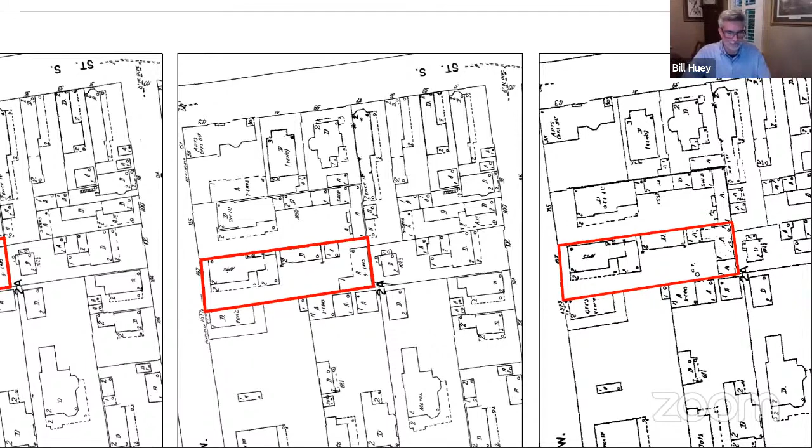I will put it to a vote. Hunter? Yay, in favor. Julia? I'm going to abstain on this one. Eddie? Yay, in favor. Bill? Yay, in favor. Chair votes with the majority. And with that, the motion passes with 4 voting for and 1 abstention.

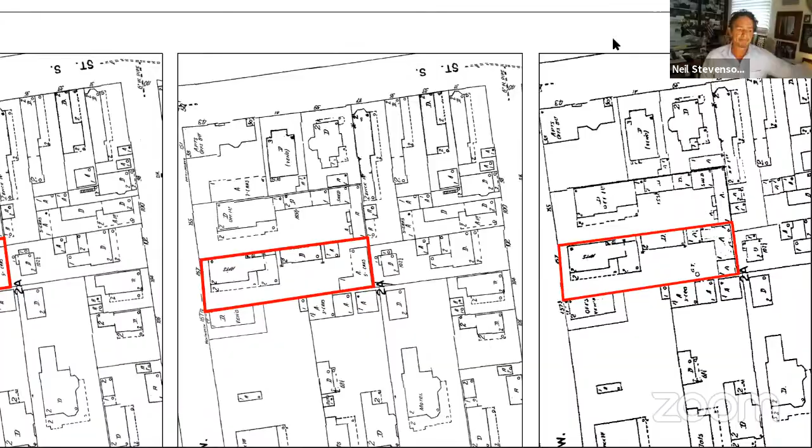Eddie and Hunter, thanks for jumping in tonight. It's nice to have you guys both here. Yeah, it was good to do that once. I like it. I'll see y'all in 6 months. Yeah, likewise.